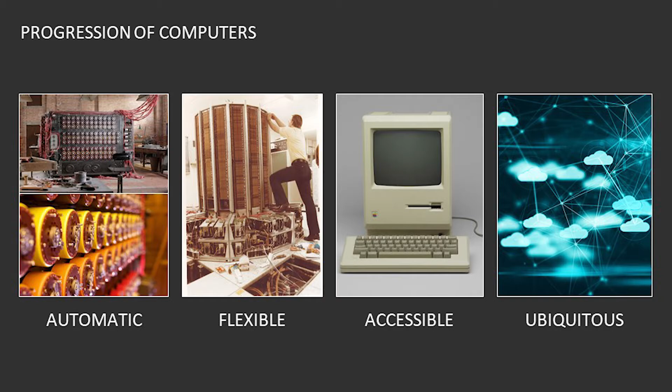And then the last one was the ubiquitous cloud model that we have now, which is about taking those computers and making them accessible everywhere—from your home personal computer to your smart devices—but it's really connecting to much more horsepower on the back end. Really, that's just a bunch of hardware hiding away somewhere. We all know it's still connected to something out there.

So putting that in context of devices that make—they've gone through the same process. The automatic process started where we took automation and applied it to handcraft type things. The machine on the left is an old stamping machine that makes automotive panels. Before that, people were just banging these things out by hand. So we took that and made it all automatic.

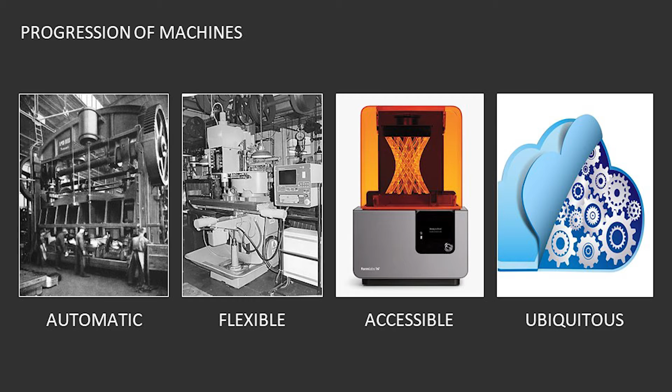Then we added computers onto that—really old jankety computers like the one on that very early CNC machine—to make that process a little more flexible. But they were still very hard to reprogram. That technology was hiding away in labs and things like that; it wasn't something people really saw out in the world.

More recently, it's shifted to this accessibility. How many people here have a 3D printer on their desk or in their office? Look around—that's a pretty good chunk of you guys. So we're at that point, over the last decade or so, where we've taken the power of making stuff and putting it in the real world, and made it accessible to a lot of people.

It has a lot to do with patents expiring on 3D printing—there are thousands of 3D printer companies now making all sorts of different technologies you can stick on your desk for literally a couple hundred dollars. We could probably order one live on Amazon right now and have it here by the end of the show. Being able to get that out in the world is really important.

The next stage is this cloud manufacturing, which is just in its infancy now—just really starting to get out there, where you can upload your data, a CAD part, whatever, up to the cloud and get a part back. That's really the next stage of evolution of all this. But the reality is it looks like that—there's just, like the computer hardware, a whole bunch of hardware sitting away in a shop somewhere connected to all those computers and interfaces and other stuff that can get you those parts.

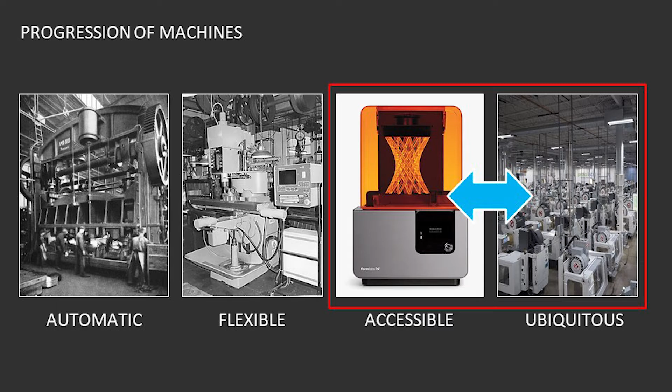I'd say we're somewhere in between these two things right now. We're not really at the ubiquitous stage yet—we're still at the accessibility stage. And that accessibility stage isn't just the stuff that's on your desk, it's really also the accessibility even to smaller companies and industry. Computation has really made that stuff much less expensive and accessible to all sorts of industries.

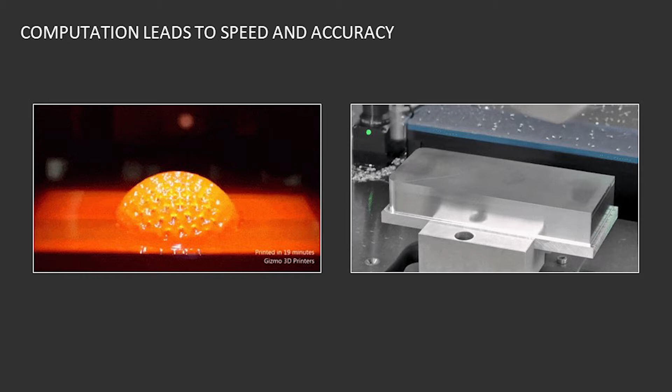One of the big advances, especially over the last 5 years, has really led to a speed increase in how people make stuff. So 3D printing on the left, that's a 20-minute print. The CNC on the right doesn't look that much different than you might have seen 30 years ago, but they've actually gotten a 50 to 100x increase just from computational power, a little bit of metallurgy, and computation on both the software side and the hardware side. All that put together has led to massive increases in how we make stuff across all sorts of industries.

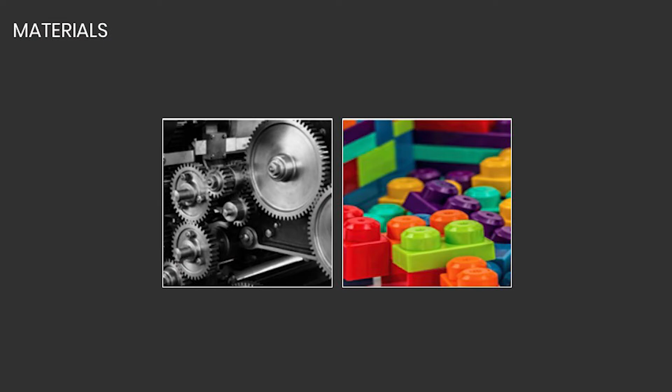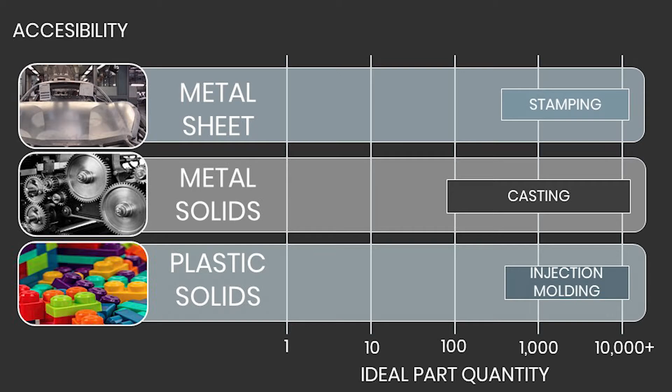A little more focused on where my company's going. Right now, a lot of those advances have happened so far with metal solid parts and plastic solid parts. And 20 years ago, you had to be a pretty mass manufacturer to get any good ROI out of making anything in those spaces. So let's say 20 years ago, to do injection molding in plastic parts or manufacture anything out of metal - casting or even machining - you had to be doing a lot of it, because the programming took a while, the setup took a while, all those steps took a really big chunk of time.

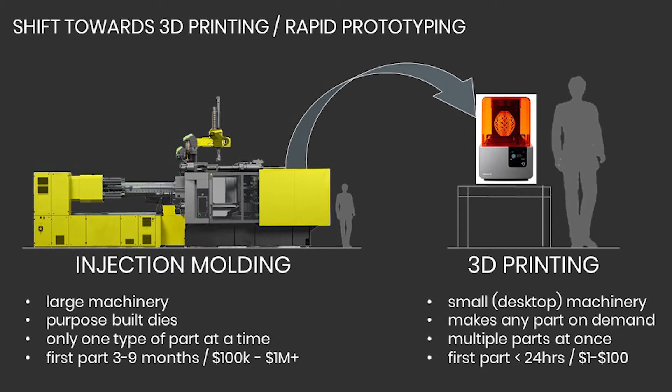In the last 2 decades, we've kind of flipped that equation using data and computation, applying it both to hardware and software. At least on the plastic side, it's gone from these big honky machines - like old servers, if you will - to desktop machines. Not everything can fit on a desk; some 3D printers are still the size of this table, but it's gotten much smaller, much cleaner. You can stick it in an office and really manufacture parts almost anywhere. So it's flipped the equation - the old way was faster but could only really do one thing, this is slower but can do a ton of different things.

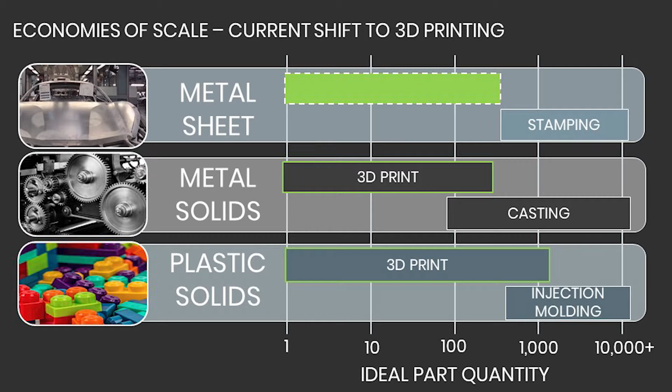And so it's filled in the gaps on prototyping and low volume production. If you want to design and create a new product, it's far easier - the barrier of entry has been lowered immensely just in the last 2 decades.

Where my company's focused, though, is the top row, which is metal sheet. Sheet metal is in all the products - you guys have spec'd it for all sorts of stuff in architecture. Automotive is obviously a major one - there's 100 million cars and trucks and buses made last year alone, a staggering number, and most of those are made out of formed metal sheet. I'm sure most of you took a car or airplane or something to get here - it's all made of that kind of stuff.

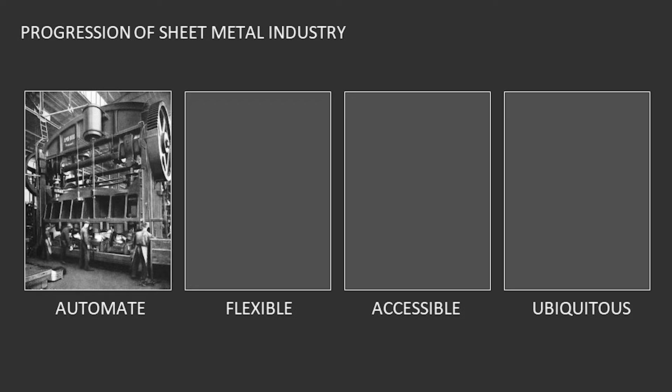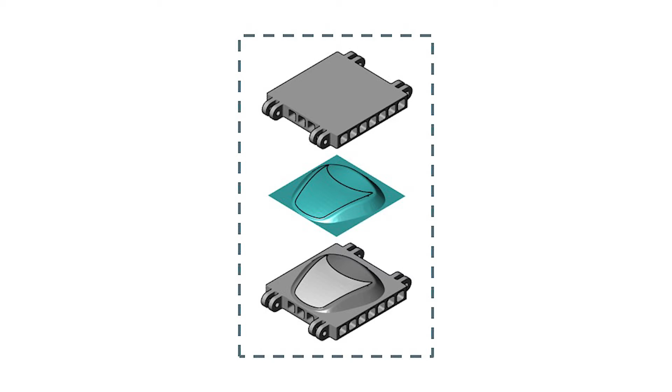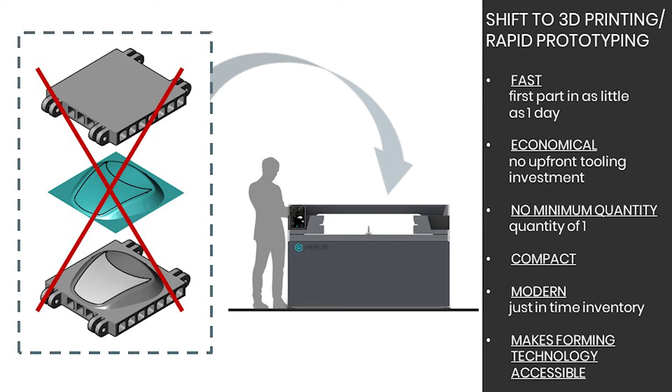Consumer products as well. The thing is, with most of the forming that goes on in the automotive and aerospace industries, we're really at the 'automate' step - it hasn't gotten to the flexible, accessible, ubiquitous step yet, because the barrier to entry is really high. Most of those parts are made with pretty simple dies, but they're very expensive. For something like an automotive fender or hood, those dies can be upwards of $1 million to $2 million and take a year to produce. For other industries like architecture, it's very hard to make the math of that production method work. Even though it's been around for a century, it's not accessible to a lot of industries, and it's still a very slow method even in automotive and aerospace.

So our concept is around making hardware that flips that equation, much like 3D printing did for plastic and other metals. The idea is to get parts quickly, with no upfront investment in dies or tooling, and really just be able to create parts on the fly, on demand. So this is a prototype that we've been working on since last year.

Hopefully it'll load in a second. But so this is our smaller scale proof of concept metal 3D printer, when it loads up.

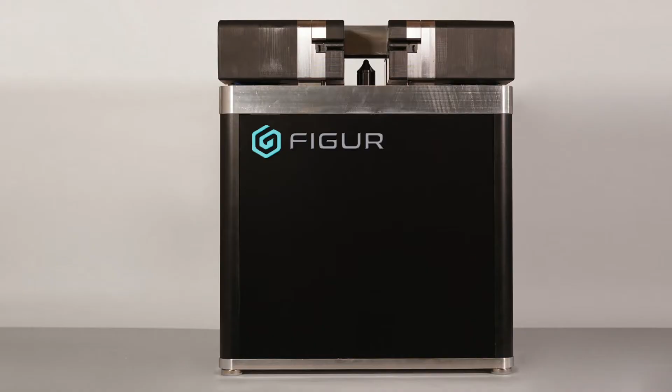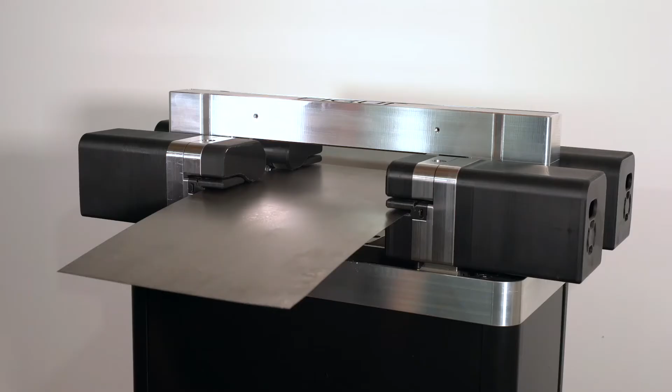The concept is that you can go directly from your CAD or digital data directly into a manufactured product. This has been in development since last year. This is one of our test beds as we're going out and proving out the technology, but the idea is that you can make the technology available quicker and easier for prototyping in industries that are already using it, stamping and things.

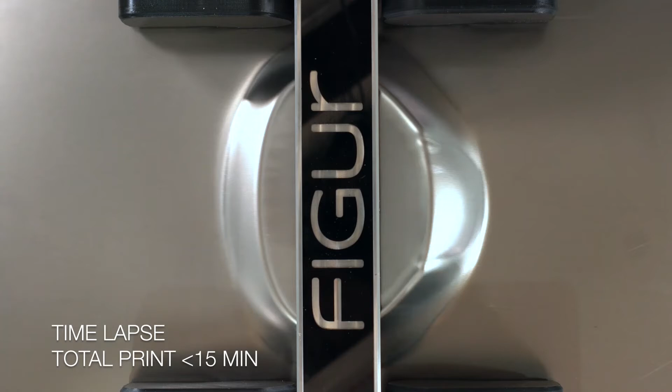Oh, there we go, nice. Industries that are already using it, but also make it accessible to people in other industries such as architecture and construction. So this is a smaller scale prototype. Again, we're looking at all different industries, but these are all directly made from a CAD file using some new methods that we've developed.

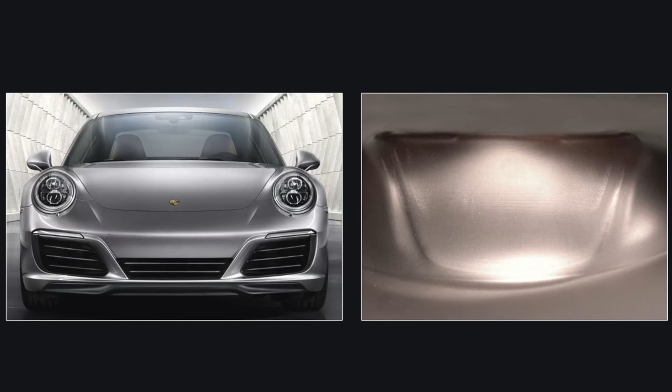One nice thing about this, it's much faster than traditional 3D printing. We're actually forming the sheet metal on the fly. There's been some research into this over the last two decades. We've developed kind of a new take on it. But one of the big takeaways here, it's much faster than actual additive printing.

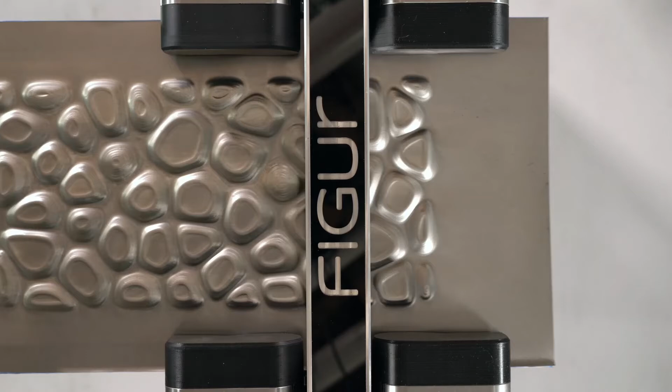The concept is that because we're just manipulating the metal into the shape, we like to say about 100 times faster than traditional additive, although as we get into larger machines, we think that multiplier is going to go up quite a bit even.

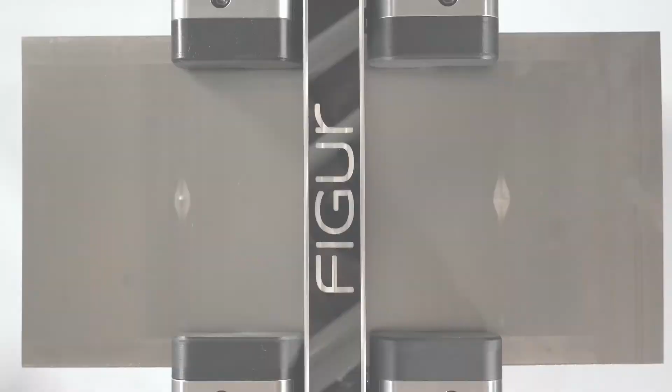I have a couple examples in different industries here. This is an architectural metal panel that was a prototype for a project. But basically, as we go from an automotive part to an architectural part to things for any other industry, there's no change in tooling or anything like that as we switch from part to part.

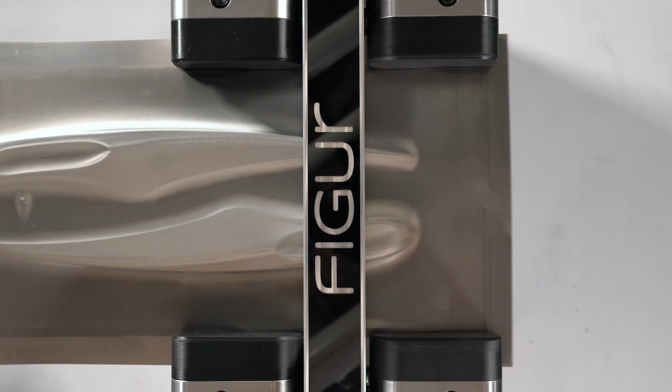So the flexibility of that manufacturing I think is what's key, and that's really the next run of machines that'll be coming out, not just by us, but all sorts of different industries. That's really the key to making them work well.

This example here was for a fin for a wind turbine, and actually these things aren't really made out of metal. One of the other applications we're going to be using this for is actually for molds for composites and other materials. In architecture, using it for molds for FRP and concrete, and in this industry it will be for carbon fiber. The concept is that we can create not just the direct materials, but very inexpensive formwork for other materials.

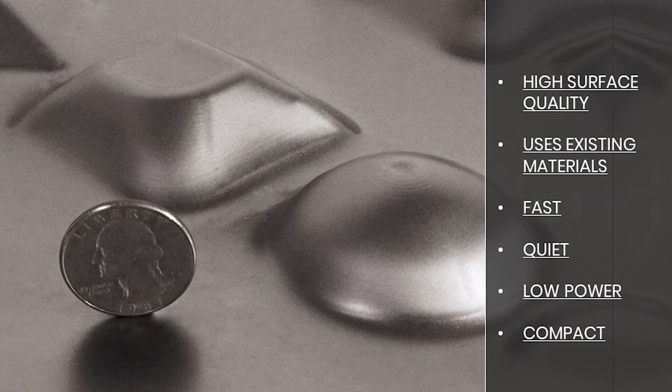That kind of gives you an idea of surface quality and things like that. We're getting close to Class A automotive right now, so exterior kind of finished work, certainly within tolerance for most building and construction projects. And this method makes no noise or sound or anything like that that you'd typically find with heavy stamping processes.

So it's much more—while it's not something you'd probably have on one of your desks in the office—it's still something that's accessible to much smaller and flexible shops.

So we kind of put this in a category that's sort of direct manufacturing. There's no intermediary step of making a mold or a die or something else to create your final product, and I think we're going to see a lot of that.

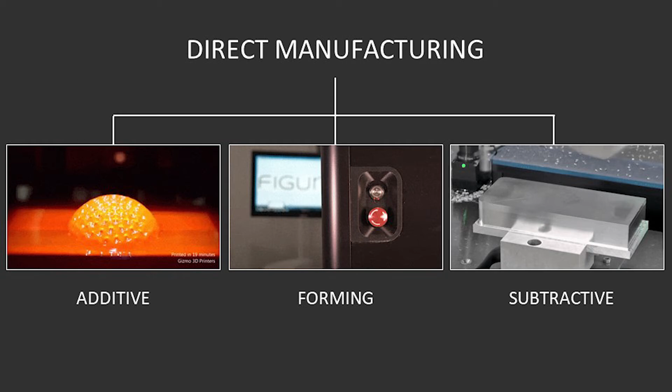We've seen in the architecture industry, for instance, concrete 3D printers. You used to have formwork to make that concrete; now we're directly forming that. There's a number of companies exploring those options. But this kind of direct manufacturing concept of going right from the CAD files that you guys are all making and working on into the part is the important takeaway.

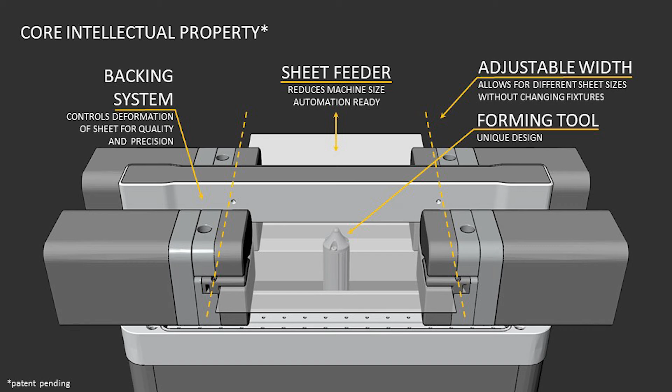I'm going to skip this. One of the things we've designed, though, is it also—the way it feeds the sheet metal back and forth—it's ready for automation. That's another big key as we move to this ubiquitous concept of computing: whatever you're doing has to be able to be automated. It has to be designed that way to be automated from the beginning.

I already touched on this - it's much faster than additive. You can get to your first part right away, very quickly.

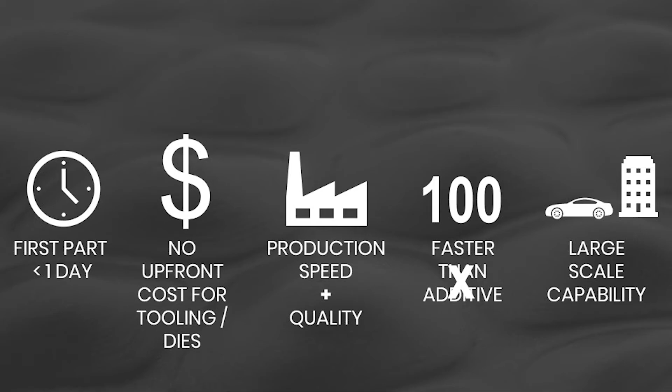We're targeting a lot of different types of industries here. But in all of them, it's really about hitting it from a couple different sides. One is prototyping and low volume. The other is on the production side.

We've done some studies with an automotive manufacturer where we can actually produce parts in high enough volume that they can get rid of their dies altogether. So that's one of the directions we're going.

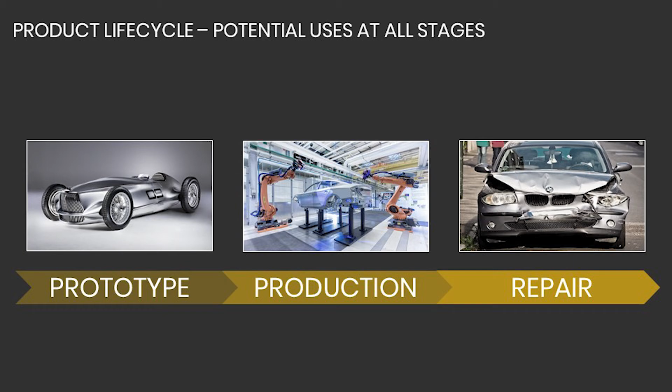And of course, repair - on-demand parts after products are out in service. It's always a big deal. It's less prevalent in the architecture world, but automotive accidents happen all the time. So to make those replacement parts a decade or two after you've made the original thing is actually very expensive for the manufacturer to keep that going and retool themselves. So it's one of the other focuses of ours.

I'm going to skip that. We talked about the architectural applications - this whole concept is going to be scaling up to architectural size items.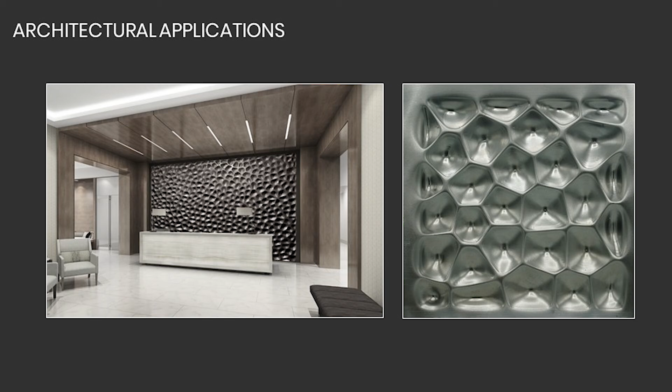I think that's an important component. Right now, 3D printing is very small in general. To get any significant scale, you have to change your methodology of how you're doing it. So to produce something that from the get-go can make something at scale is critical for other industries to adopt.

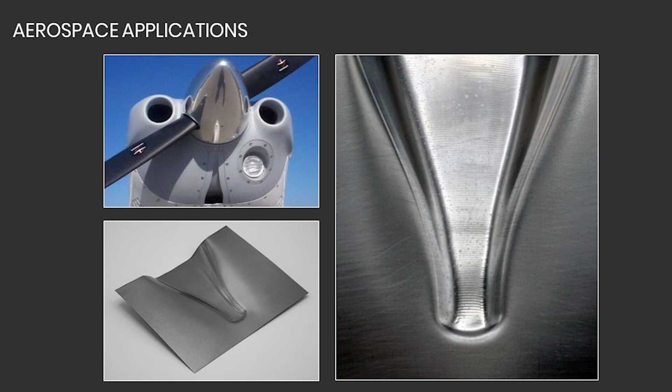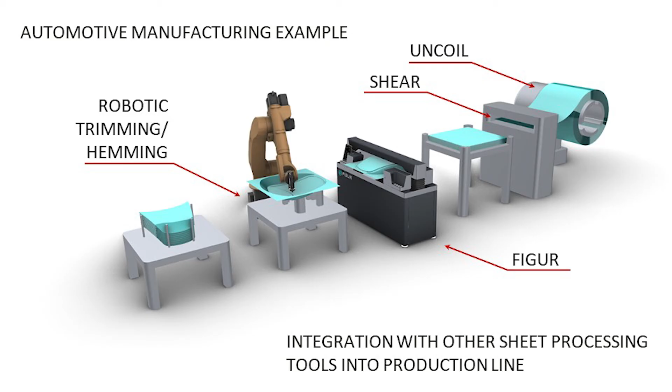It's an aerospace application - this was for a replacement part for something in aerospace. Again, very, very expensive to retool and get things up and running for these guys, so being able to direct manufacture is key.

We see a lot of talk right now about these micro factories and how do you create small flexible factories. So we're working with two robotics companies to figure out how to integrate that into a small production line. Something like this would normally require a space the size of, not just this room, but maybe 4 or 5 times the size of this room, with all the hardware, stamping, and that whole line.

So really changing that to a much smaller, flexible concept. And the thing is, all the stuff upstream of our process is already available. All the stuff downstream of our process is actually already in production. So our thing in the middle is what we see as the key to that working.

And the prototype that you saw is a small - I'll say I don't want to call it a desktop printer because it weighs about 300 pounds - but it can sit on a desk if your desk can support it.

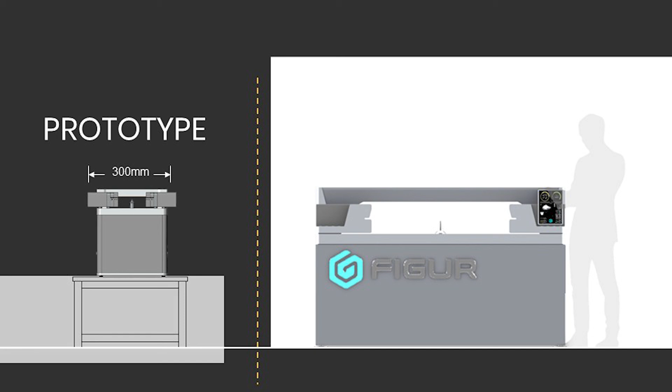The larger scale version we're working on now in prototyping is approximately - I think the text got messed up there - but it's for approximately a 4-foot width panel, and reasonably we can do about a 3-meter long panel through that machine. Just more stuff on the prototype, and of course it adjusts to different widths and things like that.

I wanted to end on this, just to put it in perspective. This started as a garage startup - the whole prototype, everything we've done in-house.

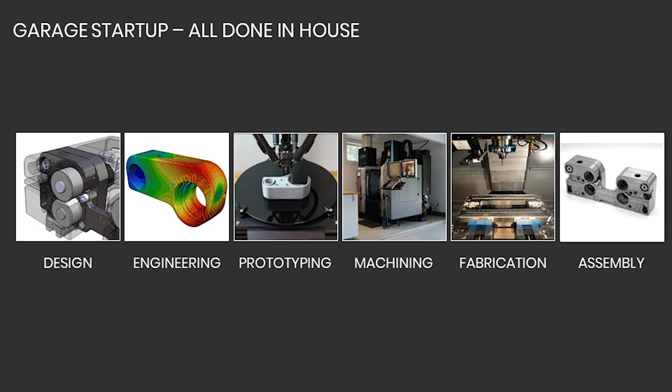I think technology is always contextual, but it also has to fit into a particular time period. We couldn't have done this 10 years ago, probably not even 5 years ago, just because of the accessibility of the various tools - from 3D printers, CNC mill, FEA analysis, all that kind of stuff. 10 years ago, the software alone would have been $100,000, and now it's practically free. 3D printers, again, you can order one on Amazon and have it at your house tomorrow.

So all of that kind of stuff makes this possible now. And I think we're going to see an acceleration in all these types of tools we're using to make stuff, because all this hardware is so accessible. I think that's it.